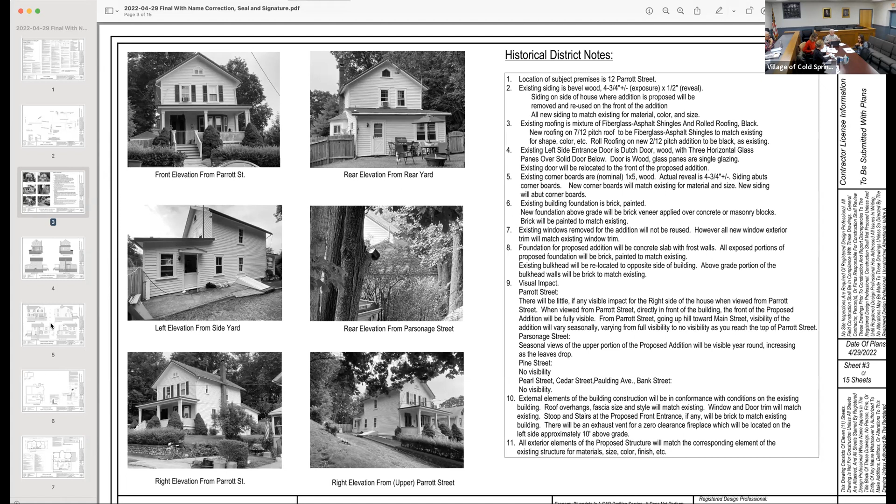We moved two years ago from a tiny place in Brooklyn, and this was like a palace. I personally grew up in Madrid in a tiny apartment, five people, my two brothers and myself and my parents. So to me this is like gigantic, I never experienced living in a place this big.

Now two years after, we're like, well mostly my husband, but I was like, oh it's true, maybe it could be bigger. Maybe we could have another bedroom for the kids, whatever. Also seeing that everyone's houses are pretty big in this town, so we started dreaming, and then we made some numbers and we're like, okay, maybe we can make this happen.

I assume those are the renderings, proposed. Okay, well one of the things which needs to be a little bit clearer is what's new and what's being added. The prior page has existing.

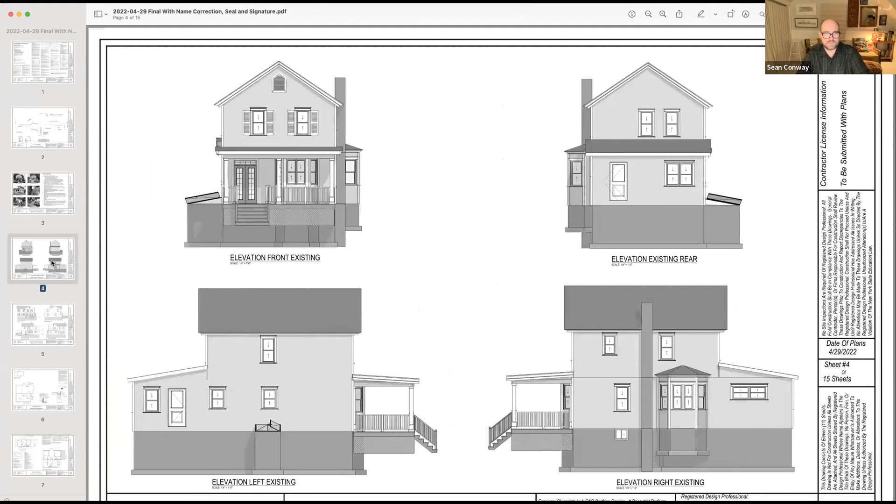And these are the images as well, I was showing those earlier. Oh, you want me to pull it out for you? Here, give me your packet. Oh, it's all in here? It's all in there too.

Actually, it's nice to look at them side by side.

So the addition is to the left. Is that another, you're adding another entrance? Yes.

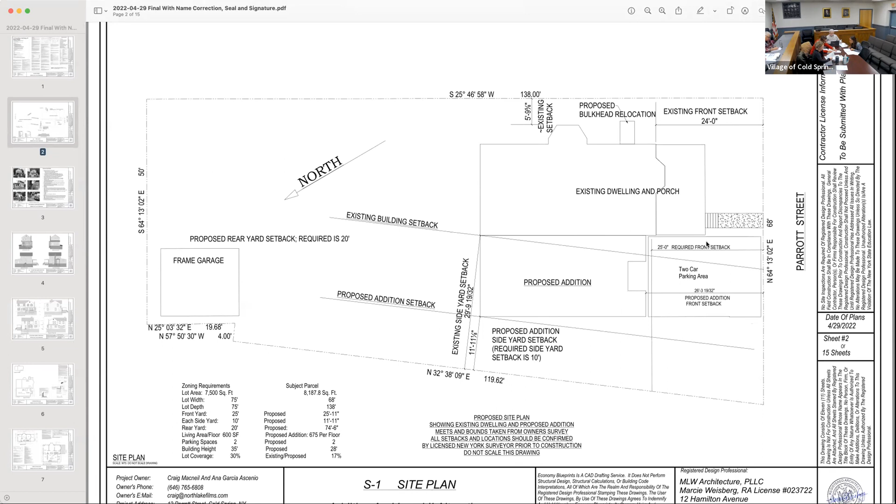What is currently like this area where it says the setback, is that grass or is it driveway? This is the existing house here, and this is the proposed. So this is also part of the property, it's just elevated, and I don't know how many feet it would be, like probably from this wall to this one, or maybe a little bit, yeah, no, this much. And it's just like wilderness in a way, and then the next property starts right there and it's like a garage.

I'll throw a couple comments. I know I've not been on the board that long, I know additions are tricky, so my other board members will probably have more opinions. I think in general it looks mostly good to me, it seems sympathetic with the original structure.

What I am noticing, and I'm not sure if I'm looking at it correctly, is the proposed left elevation. Are you guys seeing that page? If you look at where the new proposed entry kind of meets the structure, it almost looks like the second story is overhanging the first, the way a raised ranch would.

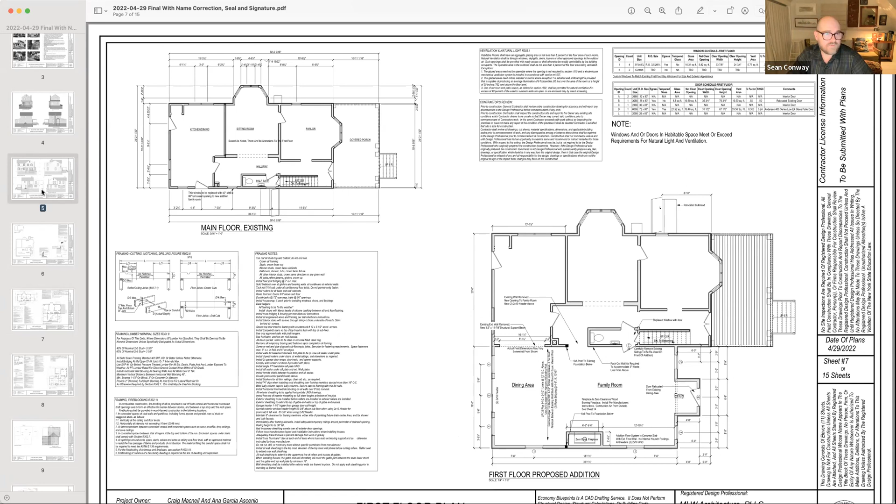Because you also end up with this strange proportion in the profile, with the little gable roof over the entry, which seems kind of not really grand enough to serve a purpose. So that was really the only thing on the drawings that struck me as being out of keeping with how additions have been added to buildings over the years.

Well, that and also it looks like if you have somebody who is not familiar with the house, which entrance would they use? Because by putting that little gable over the second entrance, or the new entrance, it gives it more importance. So do you enter through the porch or do you go to the gabled entrance?

But the other question I have, and I can't tell from these drawings, is what is the pitch on the addition in the back? The proposed, the pitch on the roof up at the very top.

The main gable looks pretty similar to the front. It's labeled as 2 over 12, or 1 over 4 for the shed roof in the back, and then the main gable is 7/12, while the front is 12/8.

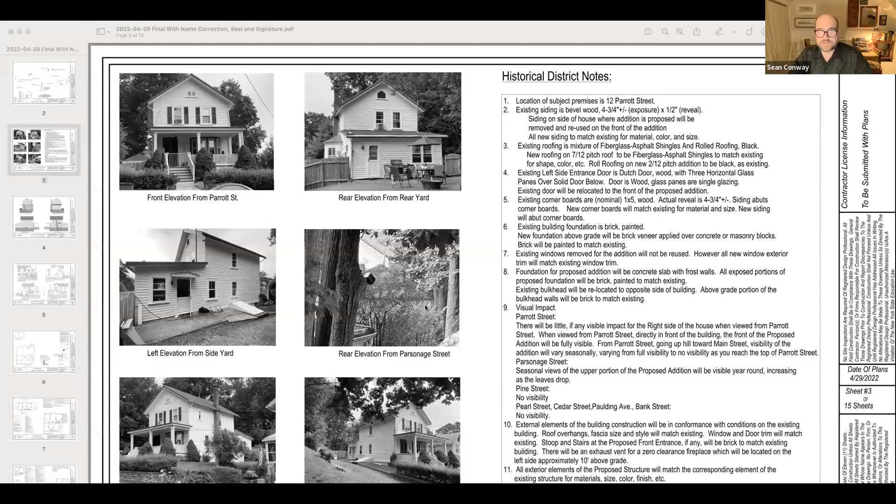I'll go back to the main packet. Materials - so all the siding and trim work is going to match what's there. We're trying to say, whatever gets removed from this wall, we'll reuse for the front.

Do we have catalog cuts on the new windows? No, the photos I submitted are the current windows that we're going to take away. And I know it says here that we're not recycling them, but I think we only have two, and on the front we have to put four. I don't know what would make more sense - trying to recycle them or getting four that look as close as possible to the original ones. Generally, just to get into windows right away, we try to do everything possible to salvage and preserve original windows, within reason, of course.

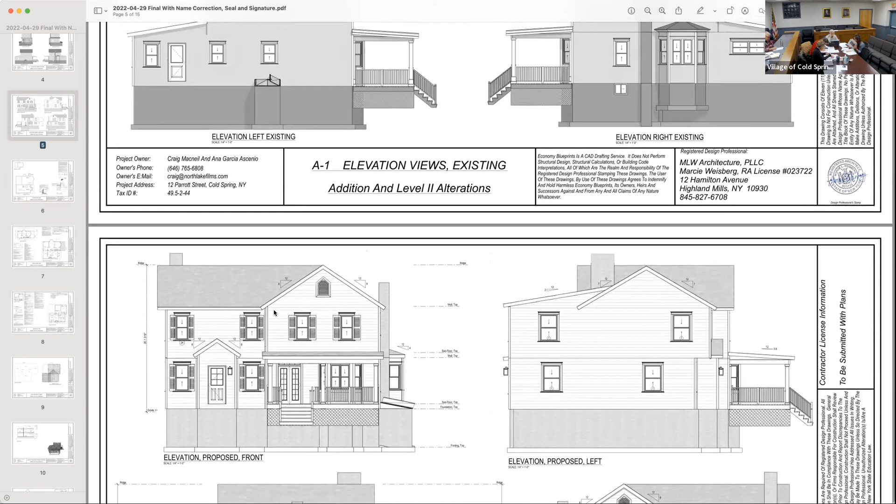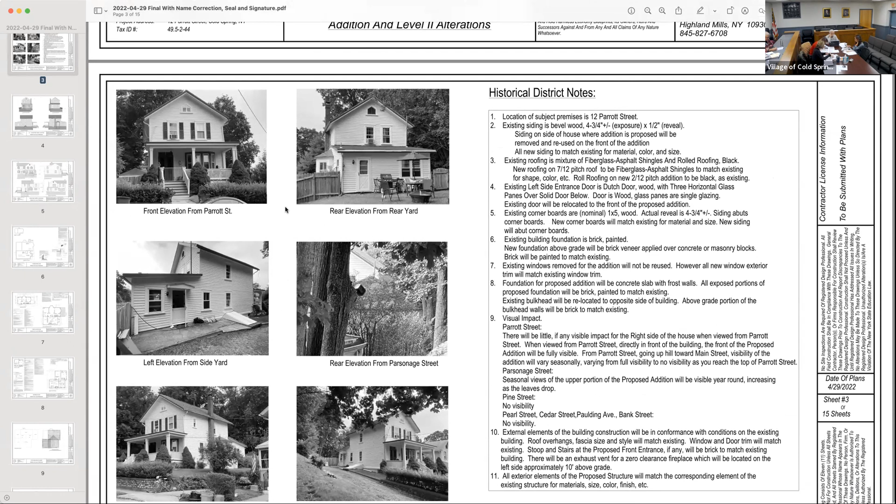Which is very typical of houses of this period in the village. The front looks to me like it's 2/2. Yeah, they are. The original, so in its current state, the windows on the upper story are 2/2, and then on the back and side they're 6/6. Well on the side it looks like 2/1, so there's a hodgepodge of different styles - there's 6/6 on the side too, so it's a mix. I would think the more original ones are on the front, but I could be wrong.

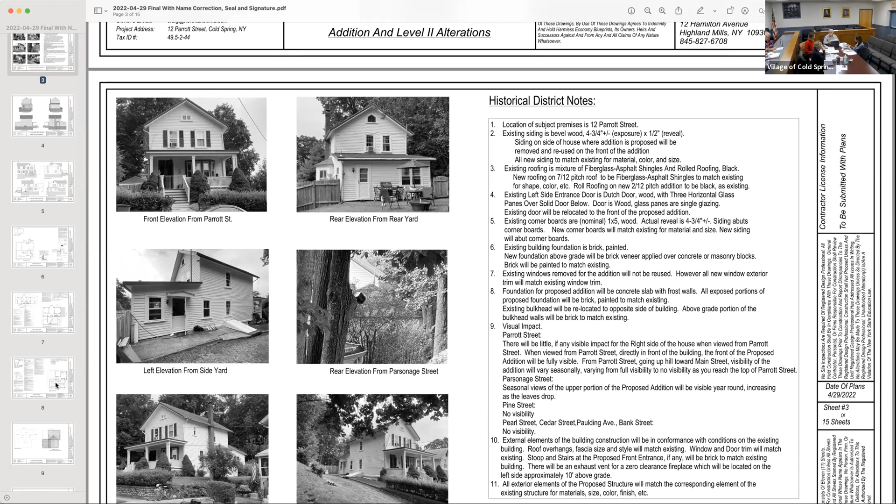I would say you're better off getting new windows to keep the look. No, mine are all single pane too, so I don't think you need to pass muster with that. On page 8 of the drawing packet there's a window schedule, and it does call them out as being Andersen 400 series, but the actual cut sheets themselves weren't included. I had written to Anna Maria and Craig about that when I sent the agenda, so they are called out as all being new.

So it's just all being new? As in not reusing any of the existing windows. I see. Oh, okay, so that means the existing windows on the portions that don't change are gonna be replaced also?

Like on the front? I don't think- oh, no, I don't know about that. I'm just saying that they're not going to be repositioning the side windows.

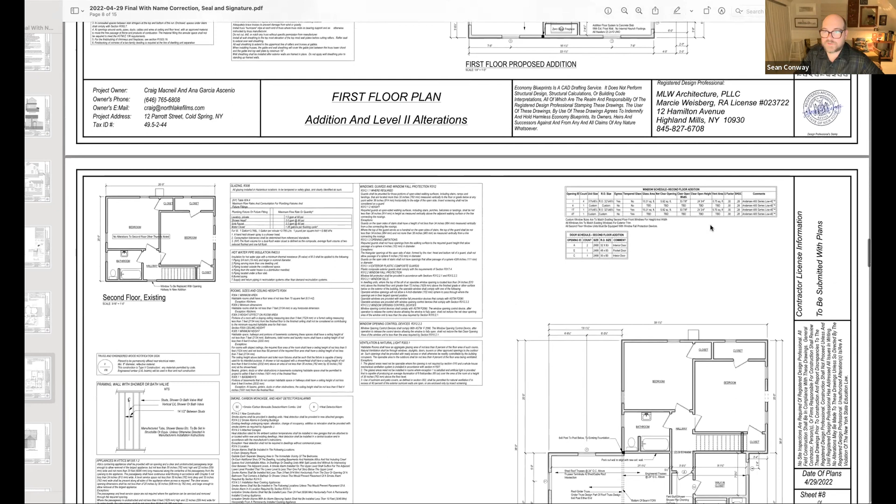Okay, well, I guess let's go back to the muntin pattern because we have a whole bunch of different types of window. What are we gonna go with? Because it's drawn as 1/1 even on the front elevation, if you look at the existing. So the question becomes, what's the muntin pattern we're using on this?

Could you explain to Anna Maria, in case she's unaware, what a muntin pattern is? It's like the number of panes of glass. If you take a look at these windows, over here there's 2/2. And back here, we've got 6/6, I think. Oh, that's why you were saying this. Now I understand. It sounds like a math problem, but really it's design.

I don't really know that I have a strong opinion about it. Well, I guess the thing is that we are making a radical change to the house. Do we have any information about the history of it?

Not that much, just the year that it was built, but we don't have more. Is this in the National Register or the local register? It's in the local district. So it wouldn't be listed on the survey from Chris.

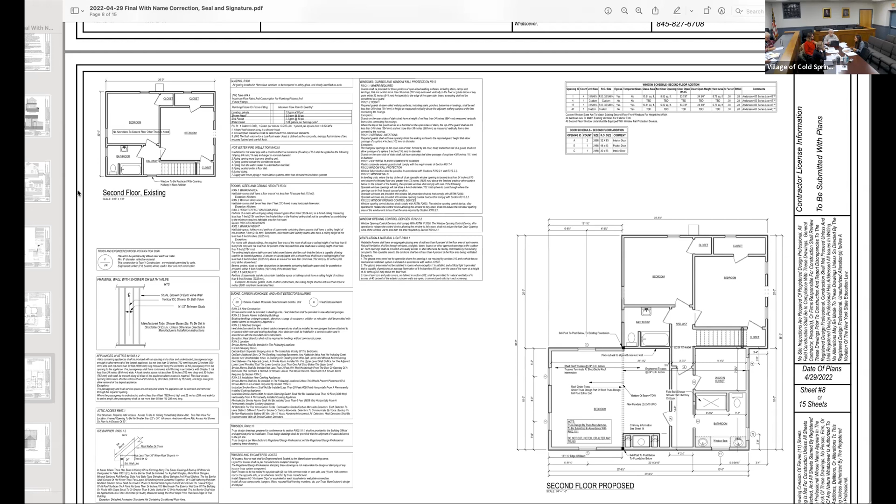Like my house, the right side, which is essentially not as big, but it kind of did the same thing, right? The right side of my house is the original from 1850, and the windows are 6/6, and then when you go to the smaller side, which is the living room and master bedroom, they are 2/2. But that was a later addition.

I would say that was a later addition for this, and I think your house probably very likely predates this one, at least the original portion. Typical of this style, probably 6/6- well, I see a lot of 2/2, and the other thing is to put it in context with Parrott Street, which is a very character-defining street for our entire village, not just at Halloween.

Yeah. Sorry. Welcome to the neighborhood.

I kind of want to take a walk down Parrott Street and look at it, because these houses have evolved. One really interesting thing about Parrott Street that I've noticed is near Bank Street- there was a building boom, and they had all those interesting filled-in porches with funky windows, where they pushed the buildings out, kind of like Garrison colonial- not the town of Garrison, but the style from the 70s, where they pushed the upper story out over the lower story.

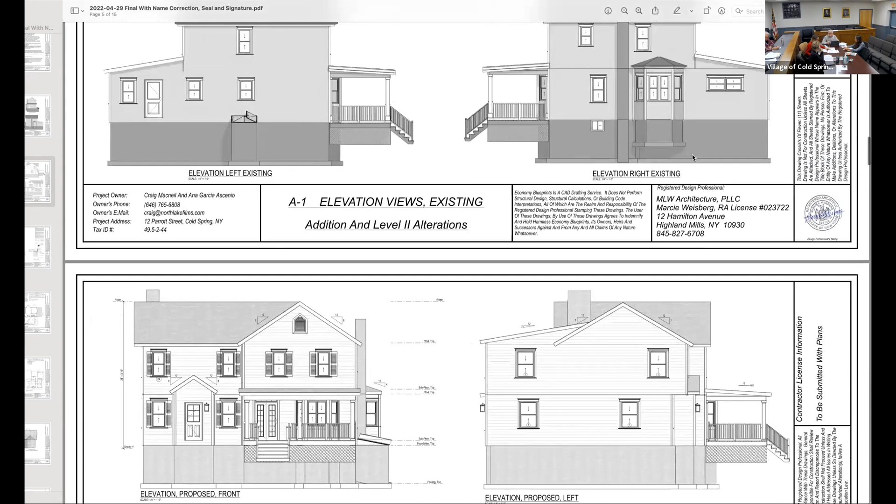I think specifically what the architect can do to help everybody visually is to draw the windows, because right now they're all just one pane over one big pane. So look at the photos of your house and make sure these are drawn correctly, so that when we're looking at this, it's easier to have a more formulated opinion.

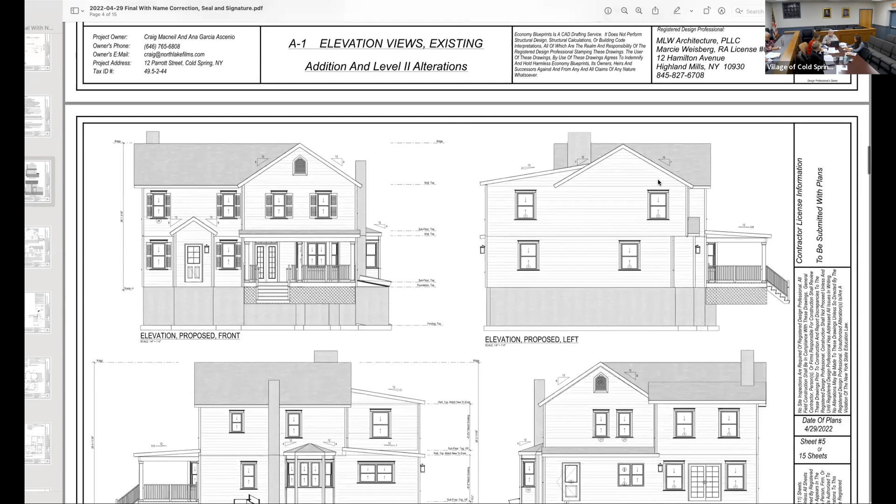But I think in general we're all in agreement. It seems that the front, these windows should match these windows. And so I would actually say I think all of the windows in the new addition should match each other, so whether it's 6 over 1 or 2 over 1 or 2 over 2, whatever you choose, all the windows in the addition should match.

It looks like they're all double hung, there aren't any casement windows for egress. Okay, the only thing is I think let them take a look at it and make a judgment, because what we could wind up having is a very discordant appearance on the side where we have existing 6 over 6, and the rear, and then we go to 2 over 2.

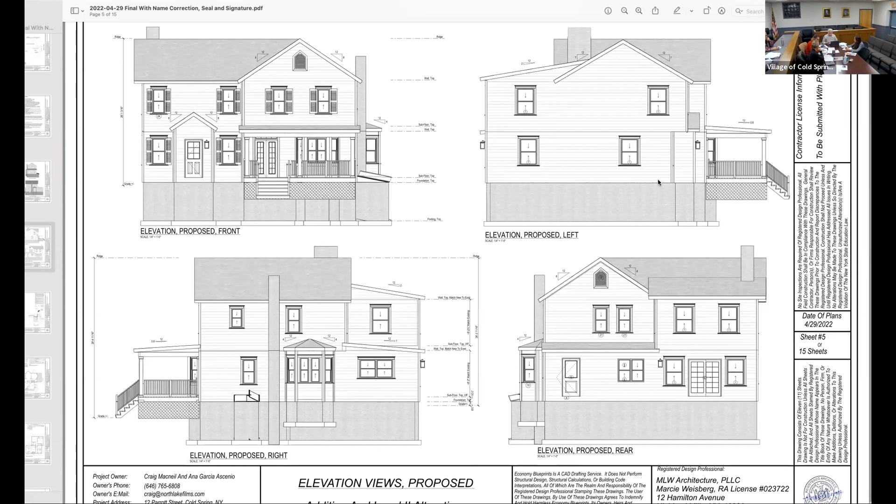I think the way this should be handled is that the architect should draw in some options, and then you guys take a look and see what would work best. Because the rear also has that first floor shed bump out, which the windows on the first floor do not match the windows on the second floor. Yeah, they don't.

I know that's not very easy to see. In the photos that Sean was showing earlier, you can see it better from the other application we did for the deck, but from the street it's very hard to see.

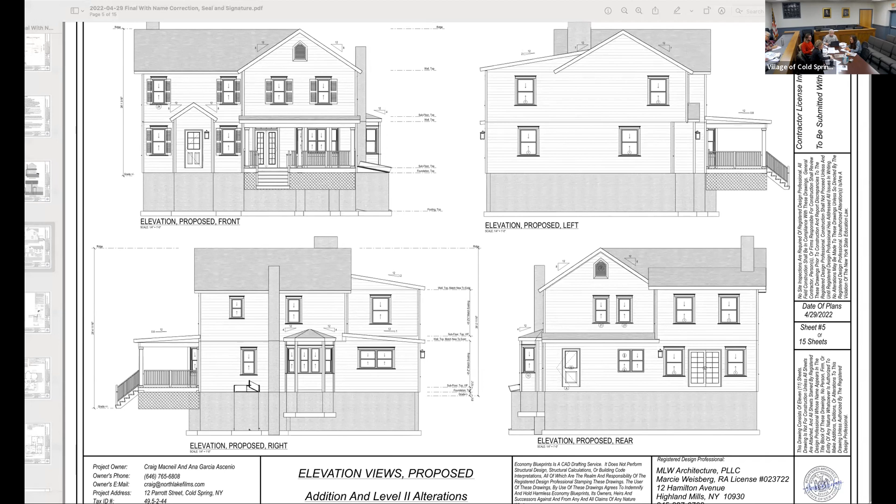Just random and curious, is this door that door? Yes, okay, so this is from the 50s, so that would put that around the 50s. I love that door, save it with your life. They want to reuse it, it's on the front, interior, obviously, but yeah, it's original hardware. Spectacular, we were hoping to, all the doors in the house are like this, very low, the handle is very low, the farm style. Yeah, I love that. My aunt has a door in her house just like that, same exact thing. Is that a Dutch door? Dutch door, yeah. I know you never see them anymore, they're really great.

The drawings indicate that the Dutch door is going to become the new front door on the left facade. Oh, that, okay, so we're just seeing the way we would do it. It's a nice way to get a cross breeze too, because you open the top part.

But I think if we're listing the things we'd like to see to fortify the application, if we could just have the same sort of image we're looking at of the inside of the Dutch door, if we could just see the exterior of it as well, since that's what will be visible. Well, it's this one. Oh, we have that. I could kind of tell, yeah.

It's a pity that the exterior is—we were planning on maybe flipping that around because it's prettier, but I don't know. Oh, I see, so the white one is on the outside and this is the inside. Oh, okay, so it looks like the drawing has it hinged on the other side. The drawing is not correct also because it doesn't show the number of panes correctly—it has 3, it has 6, and it shows the paneling too incorrectly, too high up.

That's why it's confusing. Okay, then also we probably need some information about the new French doors that they're adding in the back, to the rear. So we want to talk about the muntin patterns for the windows, the cut sheets for the windows, and door detailing for the antique door.

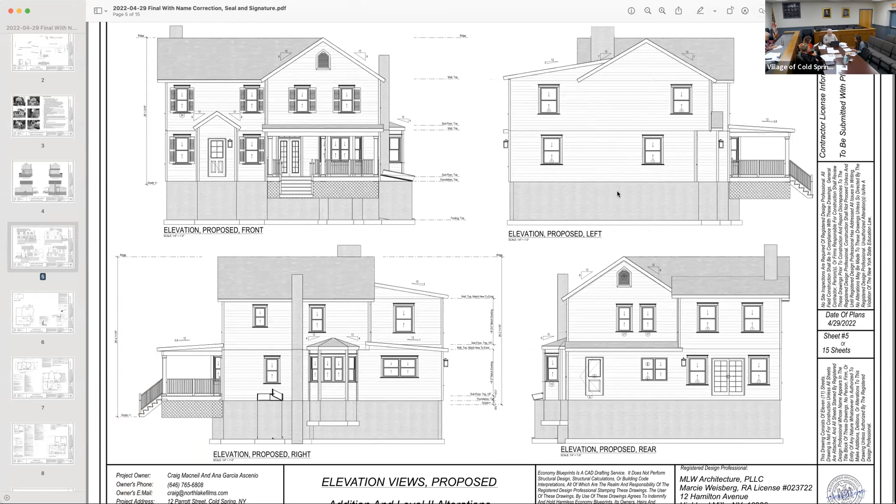Okay, so what else do we have? Going down the list, existing corner boards and following the existing building foundation, windows. We talked about the windows. Foundation for the proposed is going to be concrete slab with frost walls.

Okay, so that means there's not going to be, in other words, they're not digging a basement for the addition.

So this photo right here, the third one on the third page. On page 3, the number 3 picture, it shows the metal outside door that leads to the basement. But that one, because that would be in the middle of the living room, it would just be covered. Okay, so then you have access to your basement from the inside. From the inside of the house.

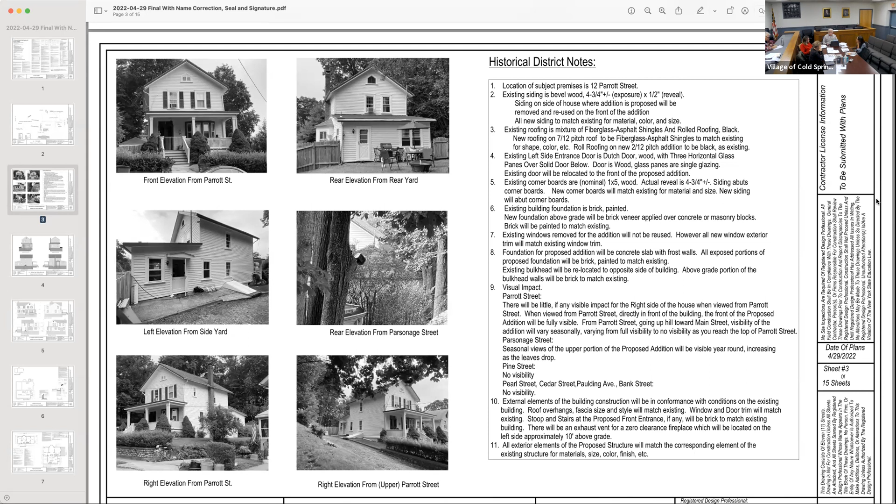Well, Lloyd, what do you think? Do you think that's going to create any problems as far as the addition is essentially going to be on slab on grade, butting up next to a basement wall?

A little concerned, yeah, that they would react differently next to each other, right? And there might be some differential movement, that's what I'm thinking of, that expansion basically. What kind of loads is the addition going to put on the existing basement wall?

I mean, right now there's a slab on grade, but there's nothing there, but yet you're essentially adding 2 stories of construction next to a wall that's holding up dirt. That's really not our issue. It's not, it's something which your architect needs to think about, and how that is detailed.

The problem is that you have the existing basement wall, and then you're putting this construction here. And basically the loads from the house are then going to be applied to the side of the basement wall. But we're not the structural historical society.

You're just giving advice, like at least I'm giving advice. Well, if your house starts falling off, maybe. At my house, before she died, she, with no permits whatsoever, jacked the entire house up. My neighbor said there was a 9-inch sag between the two structures. It partly could have been for that reason.

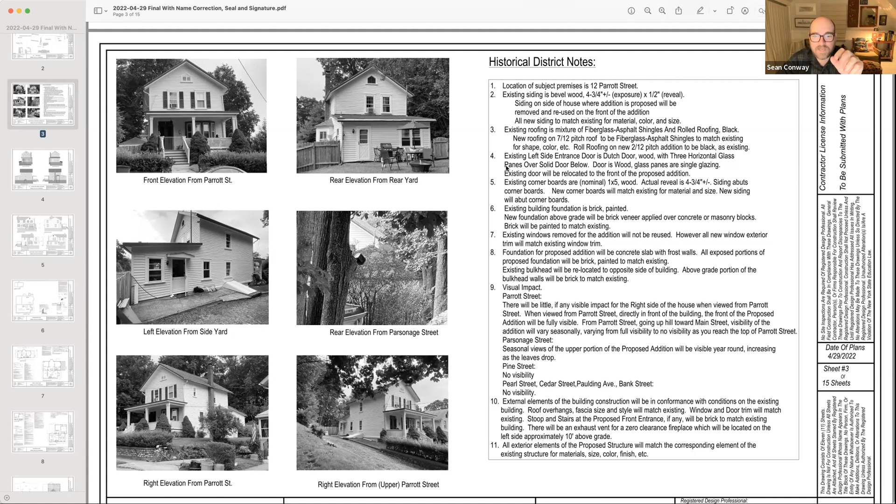I do think one thing that I would just like to see, since we are gonna look at another round of drawings, Anna Maria, is that if we can just have all of this information that's on page 3 that calls out the materials, if we can have those added to the drawings themselves as notes, just the material listings, it's gonna be much easier for us to relay that to the building department, if they can just look and see what material is what.

So that just from a document standpoint would be helpful. And also to indicate what's existing and staying and what's new on the elevations, if you can clarify that. I mean, typically what somebody does is they would draw a line and say, this is existing to remain, this is all new construction. So just make it easier for us to understand what you're doing.

One thing, I think, I'm wondering if the roof over the entryway on the side is changed to a shed roof.

Does the second floor there need a window? And I don't necessarily feel like if it does get a window, that window needs to be centered right above the door. I think if we change that to a shed roof that's the same pitch as the front porch, it's gonna end up with a very big and kind of awkward space of siding right above it.

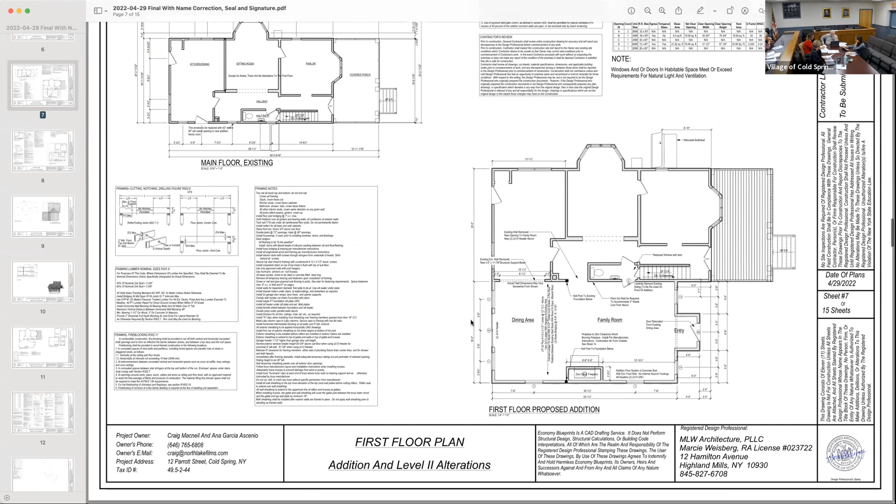And since there's precedent on a lot, maybe more often on, well, my house, it's the rear wall where the windows are kind of punched asymmetrically. A lot of times it's on the side walls. Would a window closer together, like 2 windows here and 1 window here, be an interesting way to resolve that?

Rather than have them line up with the story below, have them more evenly spaced. Maybe the left and right windows stay stacked, but if we add a window above in the middle, maybe it's tighter to the left side or tighter to the right side. Or it could be right over the door.

I think it's gonna need something when we see the drawing with the shed roof over that door. I think what we should do is just show it to us, take these 2 windows and move them to match. Yeah, that's why I was kind of looking at that, maybe that would work.

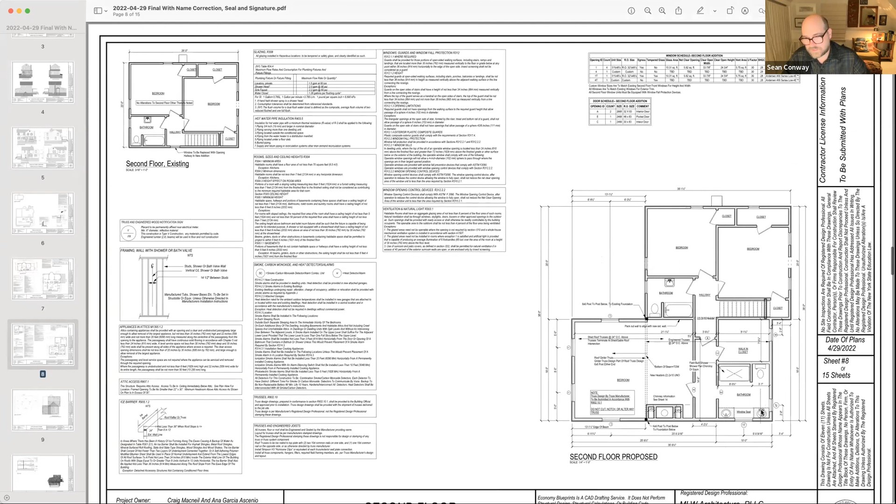Because if you look at the second story in the existing volume, they don't really relate to the ones below as tightly. I think it's a programmatic issue though, because you're talking about a window inside of a walk-in closet and a window inside of a bathroom.

And if you get rid of the shutters, you have a little more latitude with spacing them left to right a little bit. You could pull them in. Could have a smaller one in the bathroom that's off center.

Or maybe, looking at the plan, it might actually center. I think in the bathroom you could center it on the wall, so it's not right in front of the toilet and it's not in front of the sink. So maybe it's like there and there, which moves it essentially to like here.

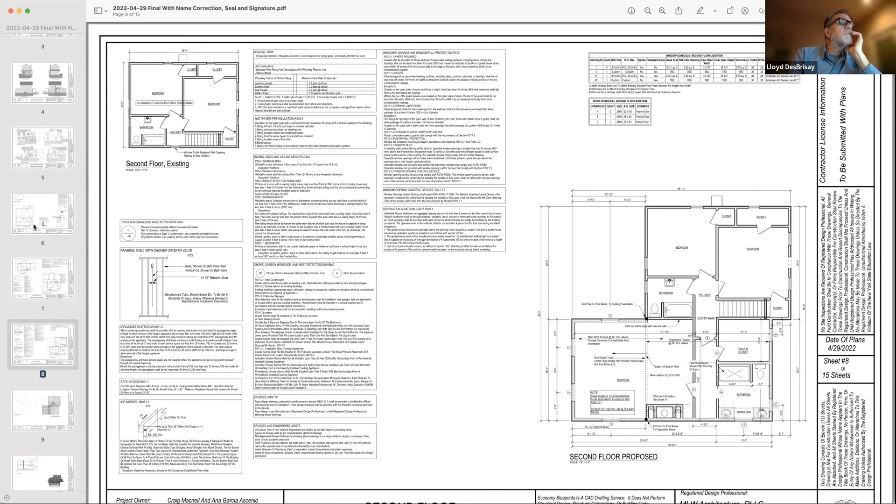Yeah, I see what you're saying. Okay, so that's up to their architect to work out. I just wanted to point it out. Yeah, I think it'll have a comment about it. It'll be clearer once the roof is changed. I think that was a good comment.

Al, is this something that you would expect we would conduct a public hearing for? I mean, it is a sizable addition and it is not on the rear. Yeah, that's true. Let me put it this way: this is something that I would consider we would do a public hearing for. Do you agree with me?

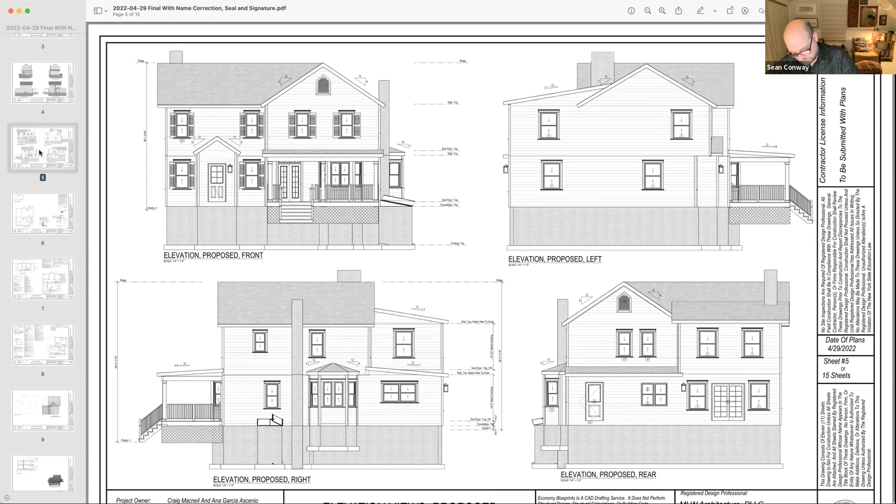I do. Okay, so as far as timing and planning for the applicant, we just want to make sure that we are setting reasonable expectations. What Sean is talking about is that we have the option of calling for a public hearing, and usually that is done for additions that are significant to the structure. I think this is a significant addition, so I'll call for a vote on that.

Okay, do I have a motion that this project be taken to a public hearing? I'll move. I'll second. Okay, all those in favor say aye. Aye, aye, I guess.

I guess isn't that a vote? Let the record show that I guess. Well, you can say no. I mean, it's gonna, I have to agree, the public hearing is gonna pass anyway. Yeah, it's a sizable addition.

Okay, were you yay or nay? Okay, the significance of this is that what we'll have to do is, well first of all, I think you need to take this back and rework it a little bit and come back. And I guess this sort of goes into when we would have our next meeting.

For sure, it'll be next month, a week, 4 weeks from now. But we do have an option of meeting towards the end of the month, if you think the architect would be ready with his revised drawings.

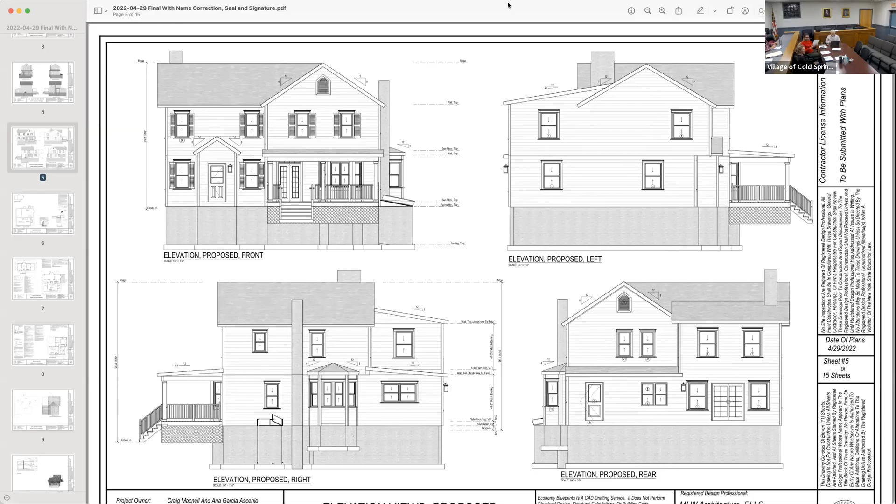Okay, are there any other comments, oh we should spell this right, Ascenio. 40 Main, is there anything else for 40 Main? Not for me. I don't see anything.